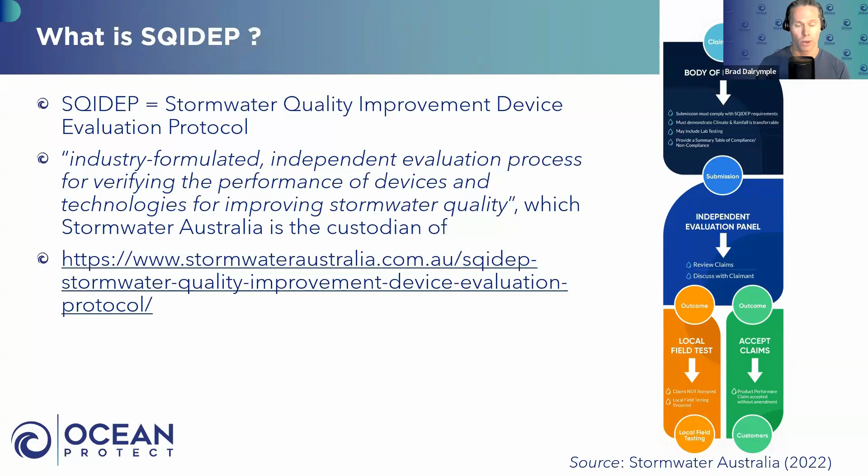So for those who don't know what SQIDEP is, lucky you. But it is an acronym. We do love our acronyms in this industry. It is a stormwater quality improvement device evaluation protocol. It's basically just a protocol or a procedure that's managed by Stormwater Australia to essentially evaluate the performance claims of stormwater quality improvement device manufacturers like Ocean Protect. And there's a whole bunch of information on that website as well if you're keen to find out more. Where is it applied?

And I think historically it was envisaged that this would be like a national protocol that would be applied everywhere. To date, at least, that certainly hasn't come to fruition for a bunch of reasons. But fundamentally, it's predominantly a Southeast Queensland thing. So if you want to put in proprietary stormwater quality improvement devices in a couple of areas, particularly Gold Coast and Ipswich and Sunshine Coast, you must have a SQIDEP verification.

In Logan and Moreton Bay, you don't have to have it, but they have at least indicated that they accept the performance values that SQIDEP have verified. Brisbane City Council are in a similar boat. They have indicated that they're going to move eventually to a mandatory SQIDEP requirement for all devices, but they've extended that requirement out several times already. So who knows what they're going to do next? But fundamentally, there's at least 3 councils in Queensland that if you want to put SQIDs in, you have to have SQIDEP verification.

In New South Wales, there's Aerotropolis in Western Sydney that you do need a SQIDEP verification. And Blacktown City Council do refer to SQIDEP as a requirement for new SQIDs in their WSUD developer handbook. But there's also some additional requirements that they put on proprietary devices. And to the best of my knowledge, in Victoria and South Australia and Tasmania and WA, ACT, and NT, I don't really see SQIDEP getting much of a mention, but I could be wrong.

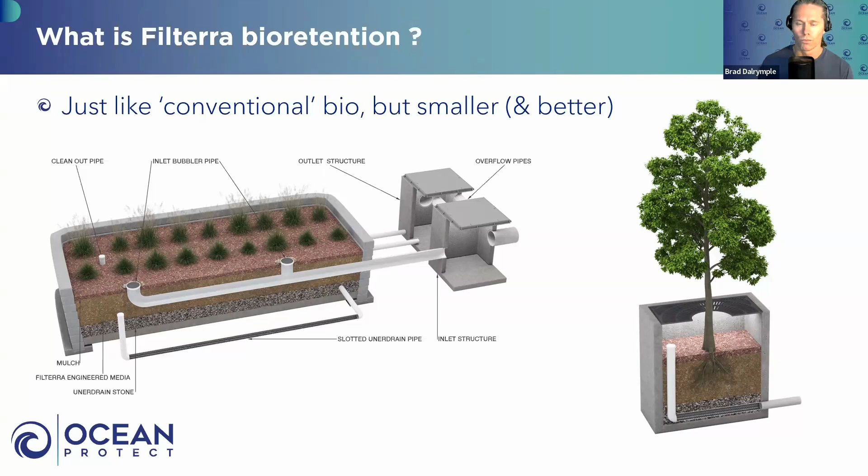We don't just grab a spec for stone and, oh, that will drain and that's great. The three layers need to coexist together to get the most out of it. That's why we don't need things like transition layers. That's why we don't have to put irrigation in. If you put careful thought and process into each layer, and we don't just spec it and that's it, but we spec it, we QA, we QC, we manufacture, then we install it all as one system. And that's why we're seeing more successful outcomes with Filterra than any other bioretention system on the planet, really. And I'll show some results to that effect in a sec.

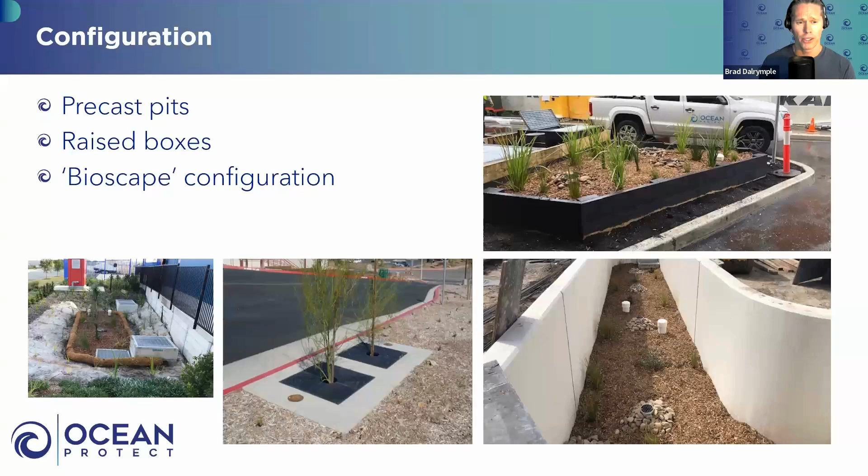But in terms of the configuration, yeah, there's pits and pipes and raised boxes as well, as you saw in the case studies. Maintenance is really simple, and I think this is a key reason why a lot of councils are actually preferring them as public assets relative to conventional systems, is the ease of maintenance. There's a lot of ways that bioretention systems can fail, and there's a whole bunch of things that we do to prevent or at least minimize that chance. But the maintenance activities can be done by pretty much anyone that's suitably qualified.

The key thing is we just recommend replacing that mulch. It's probably getting updated every day the more we find out about Filterra, but it's generally about 6 to 18 months for the mulch replacement frequency. In addition to the mulch being replaced, say every 6 to 18 months, it's just trimming the vegetation back a little bit. So no specialized equipment. You don't need Ocean Protect to do it. You can probably get a bush regeneration team to do it, etc.

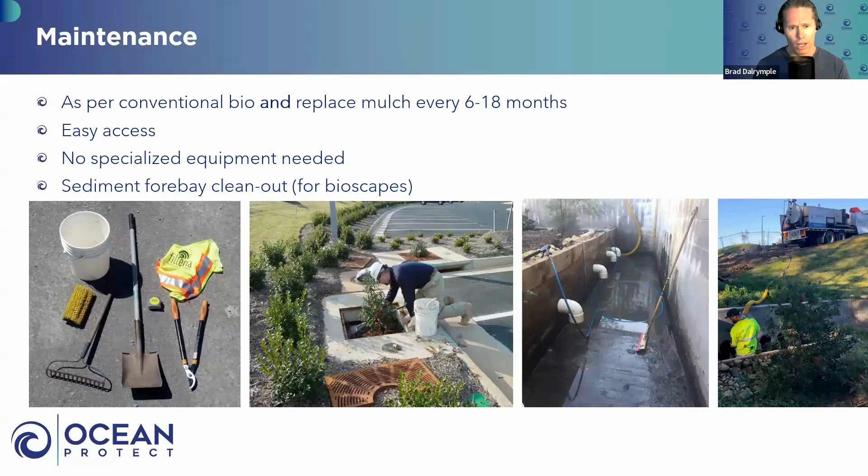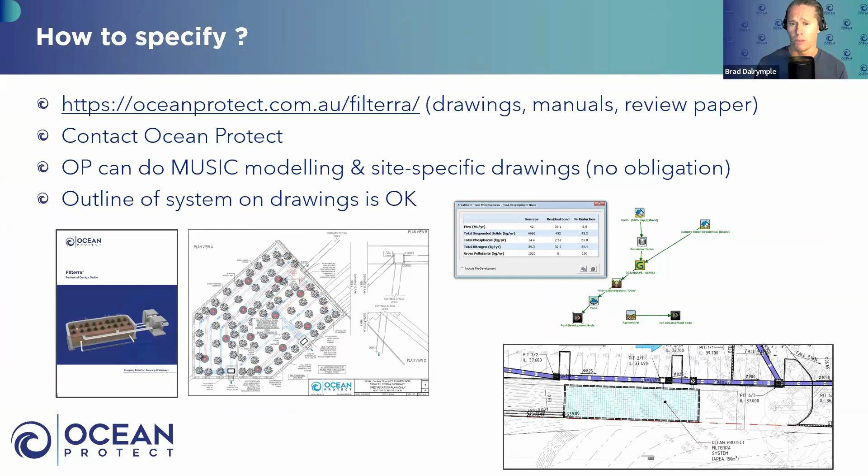And look, like I said, we've done a lot of these already. How to specify them? Very simple. You can just get Ocean Protect to help you with the MUSIC modeling or do it for you and do design drawings, etc. Generally, what we're getting is just a blob on a page, which is fine, and we can work with that. But if you're in doubt, just give us a shout. But that's a very quick crash course in what Filterra bioretention systems are.

I'm going to talk about the study now that we actually submitted as part of the SQIDEP review. First up, the methodology. Long story short, you've got to find a site that's actually suitable to test. So we started with 12 sites and did a whole bunch of baseline monitoring and assessments, whittled it down to eventually one. That site being out at Kingswood in Western Sydney.

The other thing you need to do is develop what we call a quality assurance project plan. Basically it outlines how you're going to do the monitoring, sets the rules and requirements and procedures before you actually start implementing them. So what's the qualifying storm? What's the non-qualifying storm? What's the chain of custody, etc.? Who does the analyses? How's it done, etc.? It basically provides a very robust framework to do this monitoring before it actually is undertaken, so everyone's on the same page.

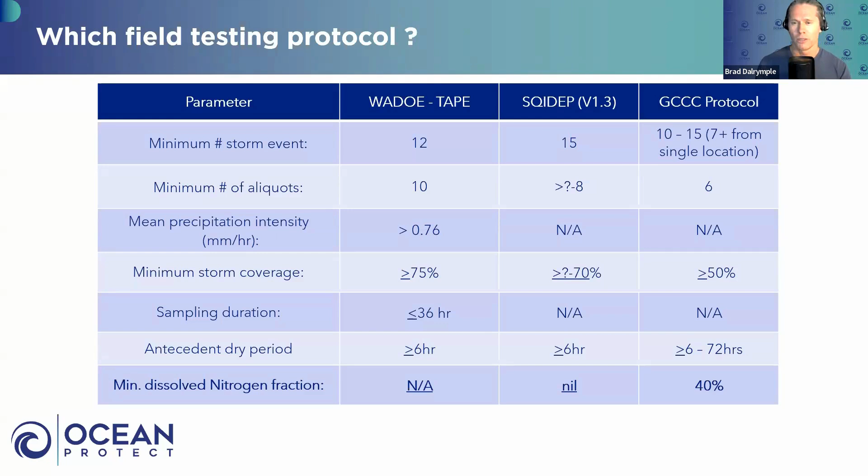One of the dramas that we had for the study site out at Western Sydney was SQIDEP was just new. We also had the Gold Coast City Council with their own SQID protocol, and also obviously TAPE in the US. They all had their different requirements or different rules and procedures. So fundamentally, we just applied a QAPP that complies with all of those existing protocols. Keep in mind, we actually started monitoring on this site in 2018, so we've been monitoring for 6 years now. But in that time, Gold Coast have made their protocol redundant. And obviously, SQIDEP's a little bit more, I guess, well known, particularly in southeast Queensland.

So why wouldn't we just use SQIDEP? Well, fundamentally, it was early days of SQIDEP. And still now, it actually isn't endorsed by a bunch of key stakeholders. So if you look on the websites of Stormwater Victoria, Stormwater New South Wales, Stormwater Queensland, they all provide advice around the application of SQIDEP, and they've also provided their public submissions to Stormwater Australia on SQIDEP. But fundamentally, none of those groups endorse SQIDEP in its current form, and they're all asking for improvements or changes. Similarly, other regulators like Melbourne Water and a bunch of other governments do not endorse SQIDEP.

So we obviously want a robust procedure before we actually go ahead and spend the money of actually undertaking this monitoring. So long story short, we just applied all of the rules and requirements that we could see. Michael? Yeah, and that was an issue for us. We've been talking about these issues and technical deficiencies and problems in process since 2017 when we saw a draft.

But at the end of the day, it's the only national protocol that we've got. So whilst there are issues, whilst there's problems, whilst it's not perfect, that's the only thing we can really follow. Now, with the local governments starting to endorse it, well, then we had no choice. So we were more or less forced to go down this path. As I said, it's not perfect, but it is what it is, and it's the only one we've got. I think the key now is to make it better. We need some changes now.

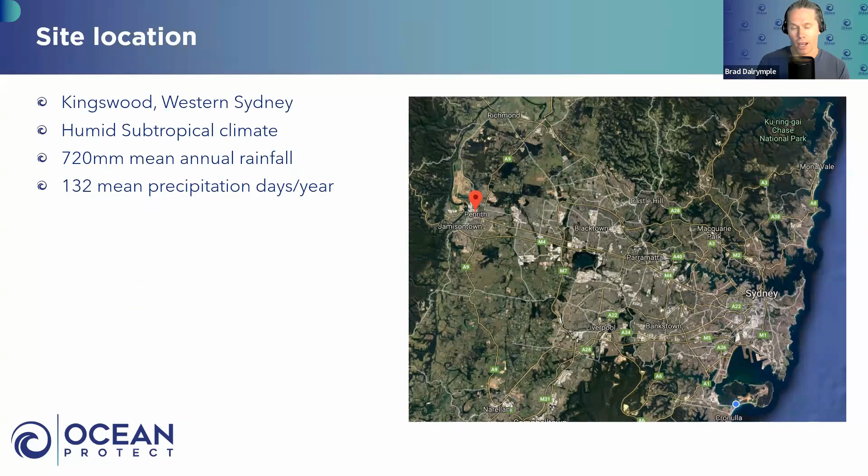Cool. In terms of the site location, I've already mentioned it's actually in Western Sydney. There, the climate statistics you can see. 720 millimeters average annual rainfall, in the car park of essentially the Western Sydney University campus at Kingswood. It's a 420 square metre catchment. It drains to a 1.2 metre by 1.2 metre Filterra tree pit system, which is 0.3% of the upstream catchment. Maintenance was typical, nothing fancy. And like I said, we've been monitoring that since 2018, and we still are.

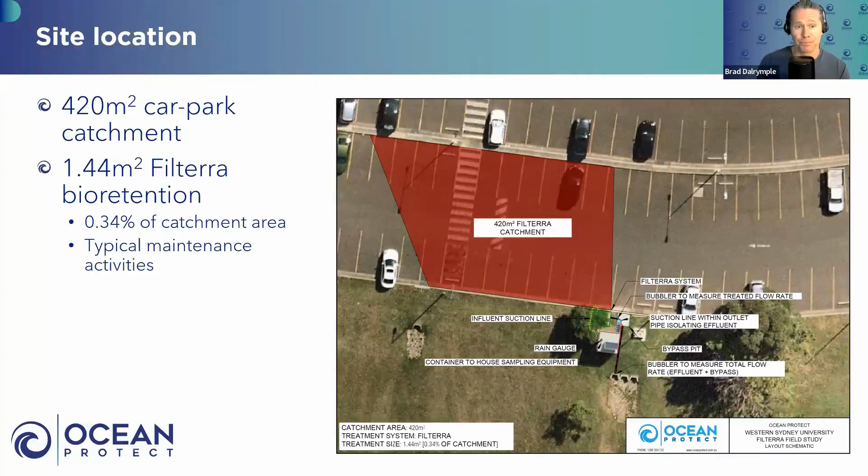The technical expertise within Ocean Protect is incredible. I'm very comfortable saying I'm definitely one of the least smart guys in the room when I sit in a room with my R&D team. So they're very smart, and it can all be done remotely. So we can program the sample collection, etc., all based on climate forecasts.

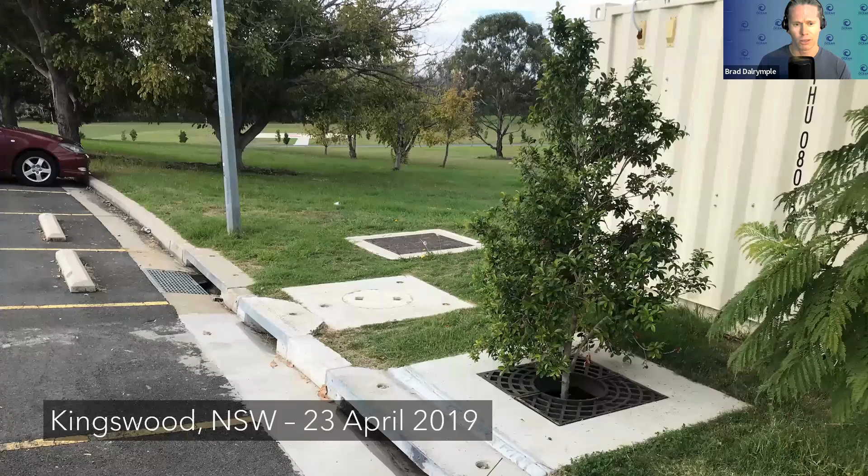Because it's very difficult to sample stormwater. It can't be done just by grab samples. We need auto samplers. There's a whole bunch of technical know-how that goes into doing that properly, and we've been doing that for a long time now. So kudos to the R&D team involved. But yeah, there's just more happy snaps of the system, and some happy snaps of the setup as well.

So fundamentally, we're measuring flow, we're measuring rainfall. It's automated sampling, so taking samples of the inlet and outlet. And for the study set or group of data that we submitted to SQIDEP for review, all of those samples were collected and analysed by ALS. So fundamentally, Ocean Protect didn't have any hands on any of the samples at all.

So we were involved in obviously the initial setup and the occasional maintenance. I think we removed the mulch every year or two. But apart from that, all the sample collection and analysis was done by an independent NATA accredited lab. And that's the key. Because we've been doing this since around 2005, we don't have to touch the site. So we can control it completely remotely.

And that's from setting up the samplers to run based on forecasts. We have algorithms to run that in the background. We have a central dashboard that we program all our sites from, because this is just one of many sites that we're field monitoring. So we run diagnostics before the storm. We have literally up to the minute forecast data coming in.

We have an algorithm programming the pacing for the storm, setting up for the size of the storm, communicating with all the samplers at all the different sites. And then when the storm actually rains, we get a notification, text message, and email. And from there, we know when the storm ends. So we can send that data straight to ALS and say, hey guys, this is the hydrograph at Penrith in this case, can you go out and collect the samples?

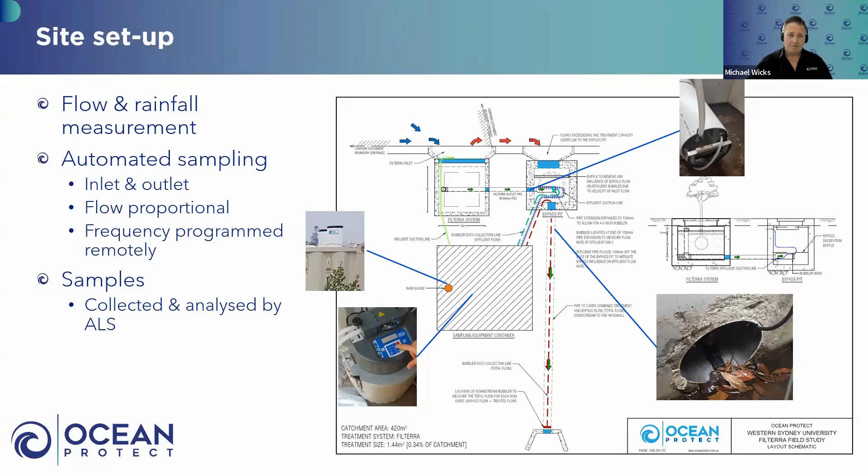Cool. Fundamentally, the qualifying events that were all collected and analysed by ALS and submitted covered basically a 12 to 13-month period. We collected 16 events, and you need 15 as a minimum for SQIDEP. And the rainfall events were highly variable, big ones, little ones, etc. And we had 5 events that indicated that the system was operating at probably full or at least nearing capacity, or certainly above what we call the treatment flow rate.

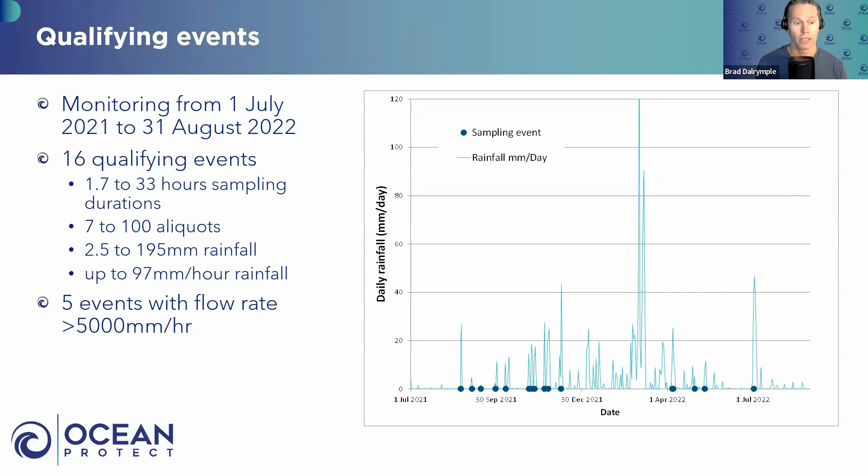So as a rule of thumb, the saturated hydraulic conductivity of Filterra is 3.5 meters an hour. It's obviously higher than sandy loam, hence we can make these systems smaller. When it's got a driving head, the drainage rate will increase, but we certainly had 5 events where the flow rates were above 5 meters an hour. So the treatment flow rate was exceeded for 5 out of the 16 events.

What do the results show? So these are the results from that set of data, and you can see here I've broken it up into total suspended solids, dissolved phosphorus, total phosphorus, NOx, ammonia, dissolved inorganic nitrogen, total Kjeldahl nitrogen, total nitrogen. What people are generally more concerned about is the comparison against the load removal targets, TSS, TP, and TN, depending on where you are in the country.

They are generally around about 80% for TSS or thereabouts, or 85, 60 or 45 for TP, and TN's generally around 45%. But fundamentally, this small Filterra bioretention system, sized at 0.3% of the upstream catchment, overwhelmingly exceeded those load removal targets, and obviously observed high load removal rates. And that's pretty consistent with what we've seen in other studies as well. And I'll talk to that in a little bit as well.

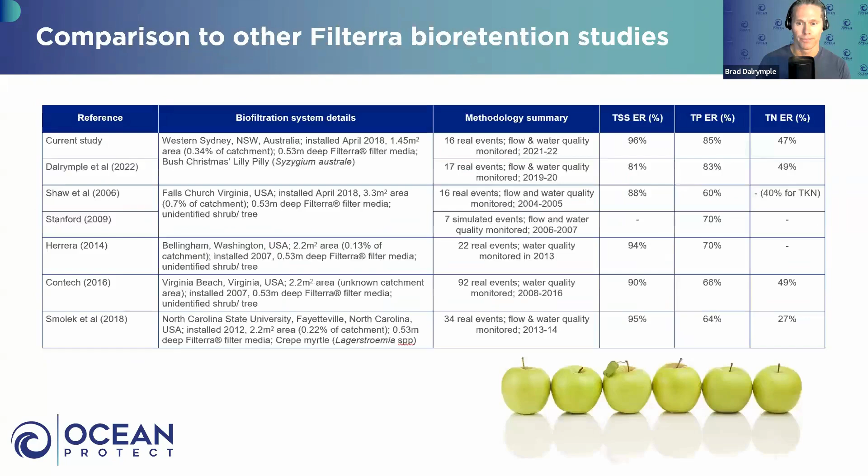And it's worthwhile noting, whilst we're looking at a snippet of time, like I said, a 12 or 13-month period, we've got 6 years of data at this one site already, and we're seeing no deterioration in performance. If anything, the Filterra certainly works better after that initial establishment period. And that's actually really consistent with what we've seen from our colleagues in the States from Contech.

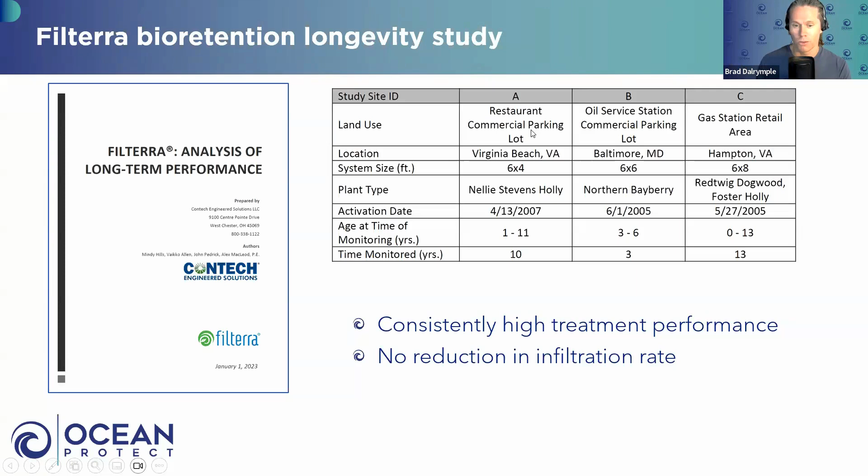They've done, and this is publicly available, I can send it to you if you like, some long-term analyses of Filterra bioretention systems that have been in the ground for several years. And yeah, similar results, consistently high performance and no reduction in the drainage rate of these systems, which is getting back to the consistency of Filterra bioretention systems.

but even within Australia, with a filter media supply that says it's consistent with the FAWB specs, for example, I think there's a real leap of faith that a data sheet from a stockpile 6 months ago is actually representative of the material that gets delivered to your site, and no one's checking that. And without that QA/QC, you're not going to get that consistency. And how can it be?

We're talking organic material. What type of organic material? From what source? Is it the same source? Is it a different supplier? Is part of it recycled? Is it not? What's the percentage we're using? 20, 30, 35%? It's no wonder. Stormwater is variable enough.

And that's always been the difficulty with stormwater. No two sites the same, no two storms the same. So you're going to get this variability anyway. But throw on top of that the complete variability within all the ingredients and their sources, together with who's mixing it. It's no wonder there's a big bandwidth of where the results come in, because there's so much change in the delivery and specification of the technology. Yeah, and we're not here to bag conventional bioretention systems as well.

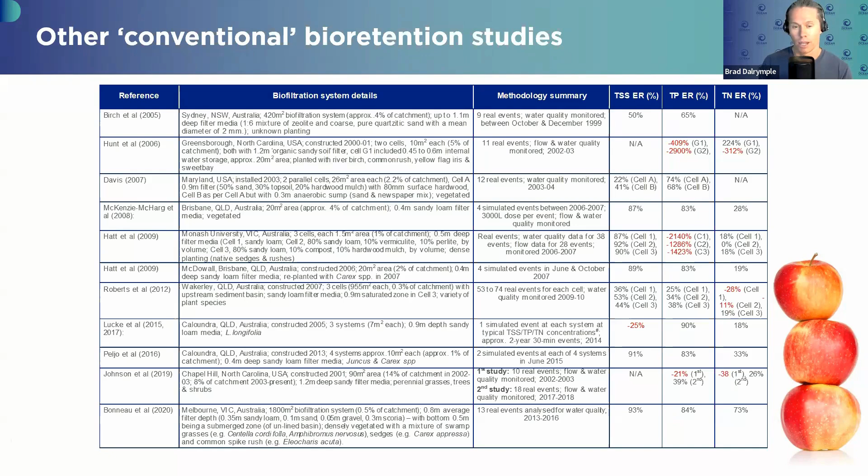I just think there's a lot that the proponents of conventional bioretention systems could actually apply from what we do and what others do, whether it's in the States with Contech guys or colleagues in New Zealand who I know are dialing in today.

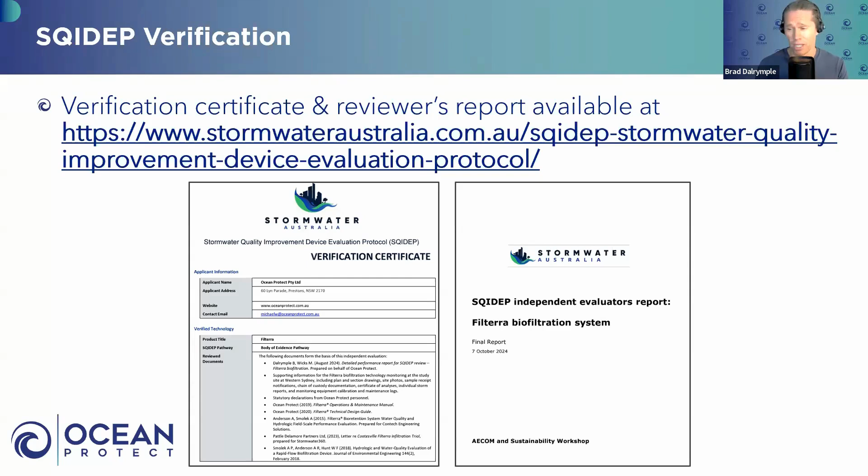But in terms of the verification, don't take my word for it. It's all publicly available on that website you can see here. So on that website, the Stormwater Australia SQIDEP website, there is the verification certificate for Filterra bioretention, but also the reviewer's report. And the two independent reviewers that Stormwater Australia employed were Mark Liebman from Sustainability Workshop and Ricky Kwan from AECOM. And yeah, I agree with Michael that it's a lot to get your head around, and I'll talk to that in a sec. But I think they did a really good job.

But in terms of the modelling, the verification certificate basically specifies how you should be modelling it in MUSIC, and the fundamental recommendation is to use the bioretention node, but adjust the filter media properties to be consistent with these Table 2 values here. So as people who have used MUSIC before and modeled bioretention systems, you can adjust filter media properties, and there's certain recommendations around, say, sandy loam or conventional bioretention systems. Basically, you use the same procedure as in using a bioretention node in MUSIC, but you adjust key parameters.

And the key parameters are, in particular, the saturated hydraulic conductivity, which we've obviously talked about. It does drain quicker than conventional, but also the TN and ortho P concentrations in the filter media. And the reviewers were very confident that using this method actually provides a good representation of Filterra bioretention systems in the real world.

The other thing to consider when it comes to the verification certificate is if there's any limitations. So the certificate basically says, look, Filterra bioretention system, model it in accordance with the bioretention node and Table 2 here, but make sure it's designed consistent with the manufacturer's, Ocean Protect's, recommendations, and also make sure it's maintained appropriately. And this is a key thing I think that gets forgotten about when it comes to the SQIDEP verification certificates. We've been pedantic around these verification certificates.

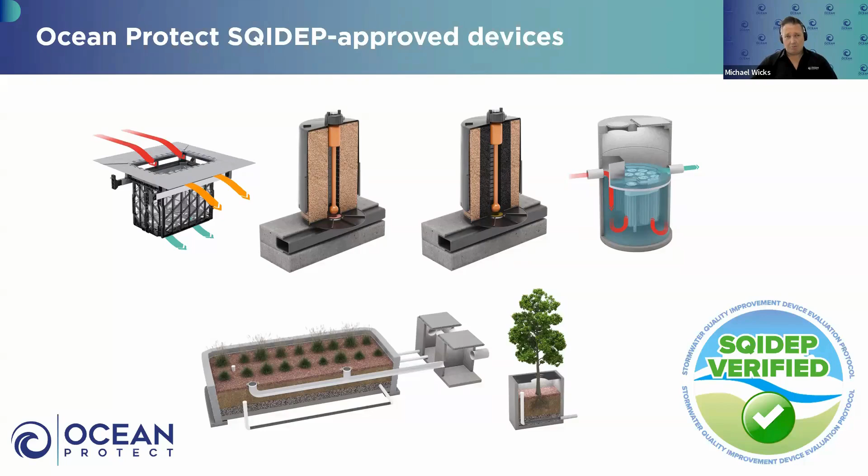And I'd say, by far, the most difficult was Filterra, given the way it can be modeled. It is bioretention, more or less. And that was credit to the reviewers there, because we said, look, the MUSIC software manual says we should be modeling it as bioretention. We shouldn't be using the generic node for this. So put all the data and the field test aside, get past that. Then how do you actually model this in MUSIC? And it's the key difference that we had.

And whilst it took quite some time, I think we all came to the consensus with the reviewers at the end that this is really the only appropriate way that we should be modeling this. It's the most appropriate way. So forget all the study and the results; to actually then apply those metrics into a form that can be used, that complies with the software manual, was just the last extra bit on top, which we never encountered with StormFilter or OceanGuard, Jellyfish, anything like that.

Yeah, it's a really good point. Actually, a couple of things to note on that. There were actually a lot of comparisons between what MUSIC predicts and what we observed on the site, and they provided a really good comparison. And then the reviewers took that further and said, okay, well, if I take this bioretention node in MUSIC with the adjusted properties, what does it look like in other climates, for example?

And long story short, they were confident that the bioretention node with the adjusted properties provided a reasonable representation of Filterra in the real world. I'd love someone to actually do that for conventional bioretention, as a side note. I haven't seen that. As I've talked about before, the conventional bio node in MUSIC, if you just use it for a conventional system, is based on lab data only. This is the only field-verified bioretention modeling method that I have seen to date. I'd love to be proven wrong though.

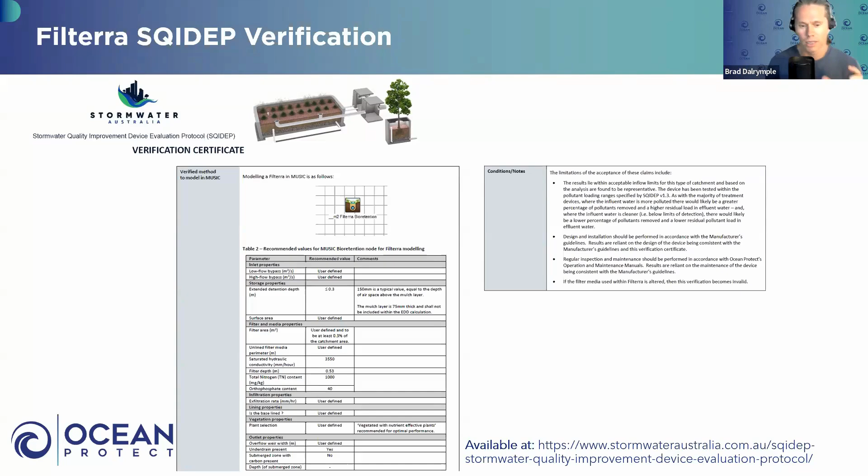But also, regardless of what MUSIC says, and there's obviously a lot of ways you can probably fudge models, etc., there's a little note in here, you can see in table 2, that these systems need to be sized at least 0.3% of the upstream catchment. And generally, we see across the majority of climatic areas and probably development types across Australia, Filterra with a filter area sized at 0.3% of the upstream catchment should be sufficient to achieve the typical load-based removal targets. And that's obviously a key benefit for Filterra. Like I said at the start, generally Filterra is 3 to 5 times smaller than conventional bioretention systems. But again, regardless of what MUSIC says, they need to be at least 0.3% of the upstream catchment area.

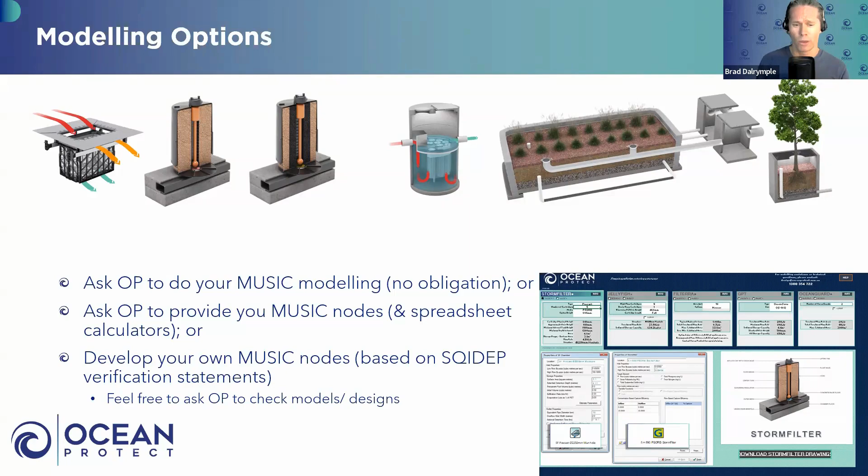We've talked about modeling a little bit, but look, if you're bamboozled with MUSIC modeling, that's all fine. You can just ask Ocean Protect to do your MUSIC modeling for you. No obligation. There's no guarantee of a sale or installation. That's just the nature of our business. We can give you the SQIDEP verified MUSIC nodes and spreadsheet calculators for the StormFilters and Jellyfishes if you like, or you can just do your own MUSIC nodes based on the SQIDEP verification certificates, which again are publicly available. And if you want, we can check the models, but we don't have to if you don't want us to. So long story short, there's a bunch of modeling options, and we're certainly happy to help, again at no charge.

The SQIDEP experience. Michael touched on this at the start. It's been a long process. It's worthwhile noting that there's a lot of work that goes into the SQIDEP submission. Obviously, you've got to pay some cash up front, and you've got to provide a lot of information. And it is a very difficult thing for the reviewers to do. So Mark Liebman and Ricky Kwan, they had a tough job. The detailed performance report alone was something like 180 pages, talking about the study, the results, the metrics, etc. And in addition to that, we're providing all the supporting information, the individual storm reports, the chain of custody information, lab results, site photos, drawings, maintenance reports, you name it, stat decs, additional peer review reports.

There's a lot of information to get through, but fundamentally, one of the key challenges was it just took so long. And not a criticism against the reviewers. I think they did a great job given the task at hand. It certainly took a long time just to get started. We submitted the Filterra bioretention in March of 2023, and we didn't actually have our first meeting until 13 months later. And then obviously there was work involved with getting it verified. But thankfully it's done now. Yeah, 13 months for Ocean Protect to get a meeting. It was interesting, but we got there in the end. Now that's no fault of the reviewers, I might note, but once we got it going, we were okay.